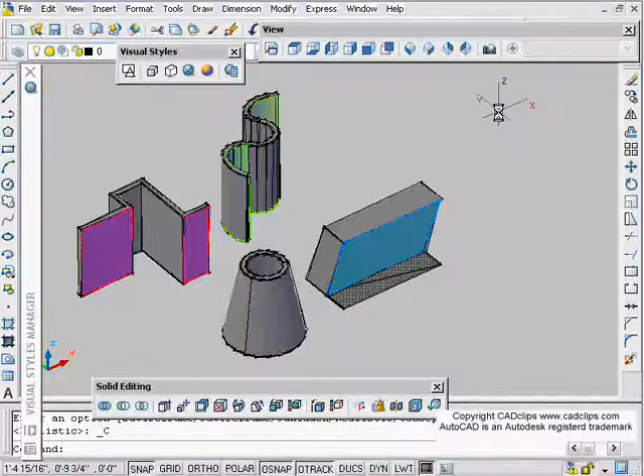In this lesson we're going to talk about Polysolids, which is a new object type. I'll start by going to Tools, Palettes, Dashboard, so I can have my dashboard in or out. In our last lesson we talked about the section plane.

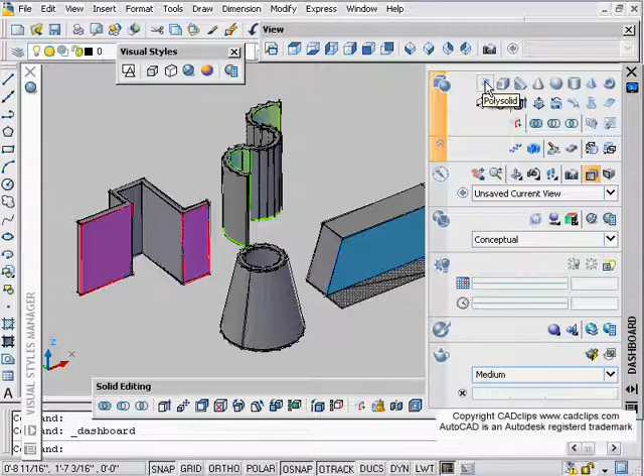Now we're going to talk about the Polysolid command. Really easy stuff - if you want, you can just pick Polysolid and start to draw, using your ortho, etc. Polysolid just draws walls in its natural state.

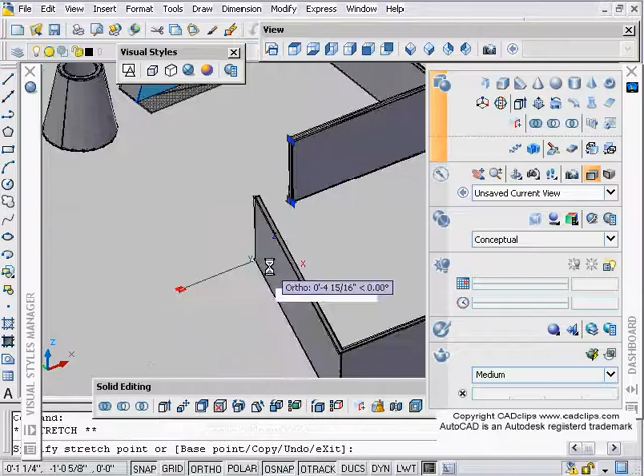Once you have that, you'll notice you have some special grips. First, you can grip here and stretch this way, and this one will stretch that way, using good old grips. The other thing is at the beginning of that Polysolid, we can grab grips and stretch these out, and that changes the whole object.

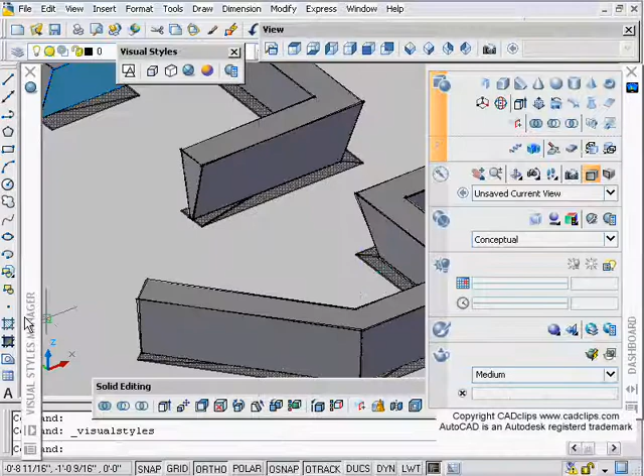I also have ground shadows turned on here - let me turn that off. I'm going to go into Visual Styles, and in Conceptual, go down to Shadows, Ground Shadows, which is right there. Display ground shadows off.

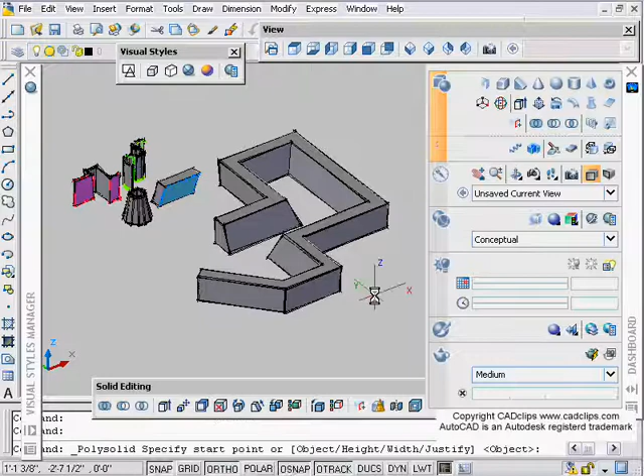Now the other thing is we can click back on here and grab this grip and stretch that out. That was just drawn again by clicking on our Polysolid command, and off I go.

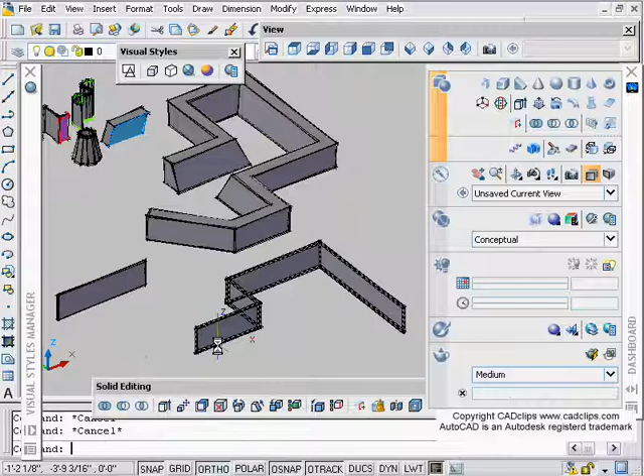Okay, the default heights and widths - the other thing is if you hit escape, it stops. Unlike some other commands, escape stops it. In this one you have to hit enter or space bar. If you hit escape, it'll just stop right there. So that's one way of doing it.

Now as you draw your Polysolid, look at your command line down here. It says object, which we're going to do - height, width, and justify. So if we say height right away, we can either type in a number or pick points. I can say, well, I want it to be this high.

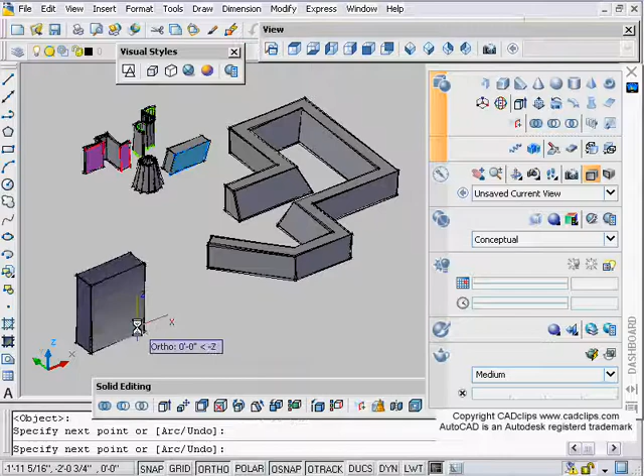And now I'm going to say W for width - I want it to be this wide. Then if I start to draw, I can use that height and width. I keep hitting escape on that, and I shouldn't - enter.

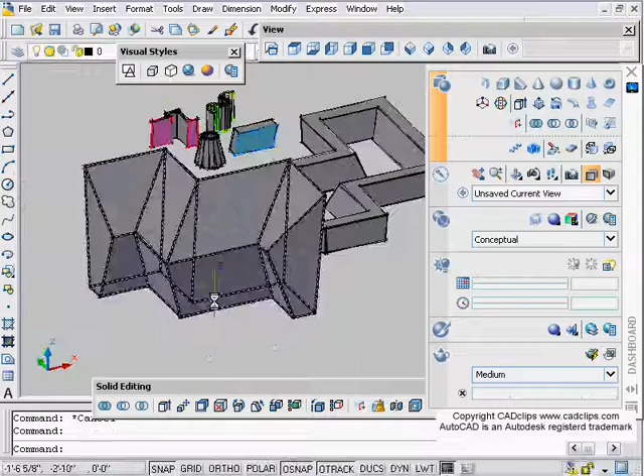So that's it, and again, same thing with my grips - up and down, do whatever I want with it. Isn't that fantastic? Use your ortho or not. You can very quickly, as you can see with shift middle mouse, get some interesting shapes right off the bat.

Okay, Polysolid - or we can just do object. Maybe I have a polyline over here. I'm going to draw a regular old AutoCAD polyline, click on here, hit enter, and pick this, and it just converts it.

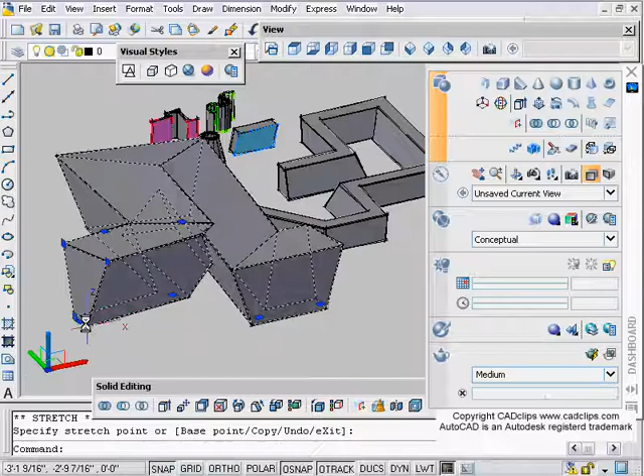After I do that, it remembered the last width and height, and then I can grip on these and do whatever I want with them. After that, if I want to draw something off of that face, I can draw a cylinder. As long as my dynamic UCS is on, I can draw off of that cylinder.

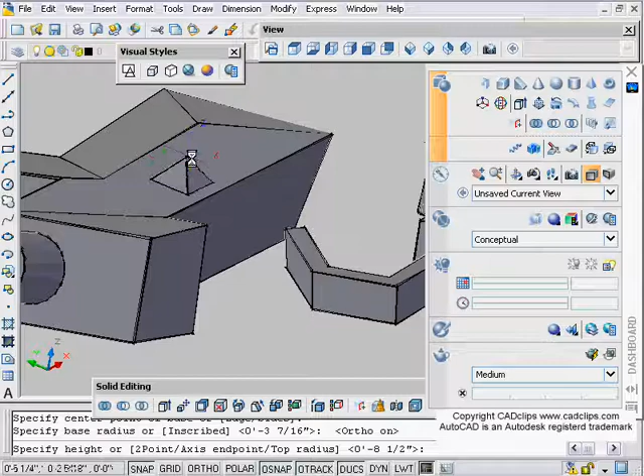So you can see how very quickly, maybe draw a pyramid using my dynamic UCS and ortho type thing, click, place that right on top of that surface. Shift middle mouse button. Let me erase these objects, and go back to my top view.

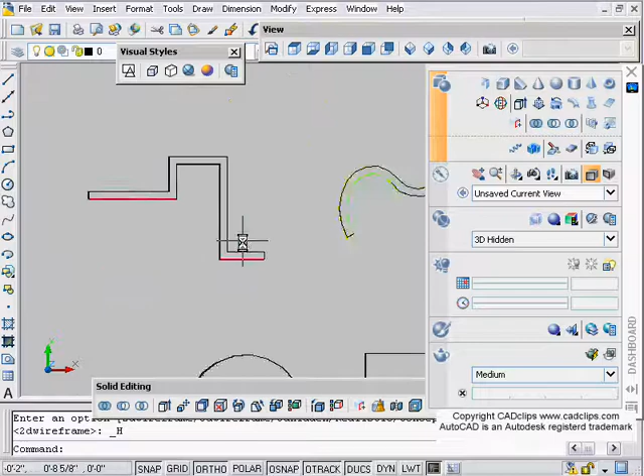That's what these are - this is a polyline that's been fit curved. I could change this back to 3D wireframe. This was a polyline, this was a circle, and this is something I made - I think this was just a line.

So let's try that. I'm going to draw a line. I'm going to draw a polyline.

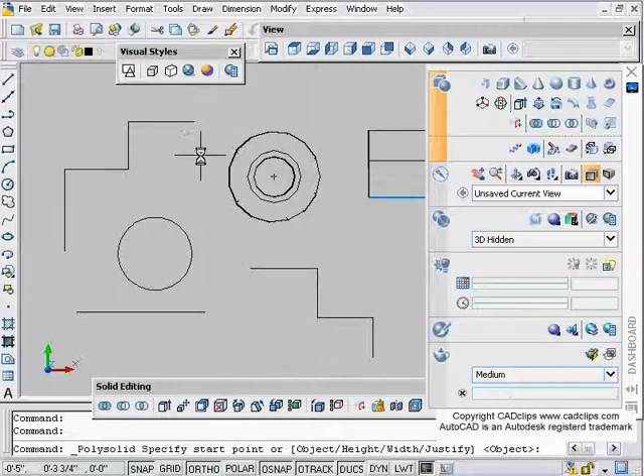I'm going to draw another polyline over here, and a circle in here. Now I'll pick on my Polysolid and set my widths and heights beforehand. Width, well I only want it to be this wide. How high do I want it? H for height, command line - about this high. Then I just hit enter, pick on this object, and it converts it.

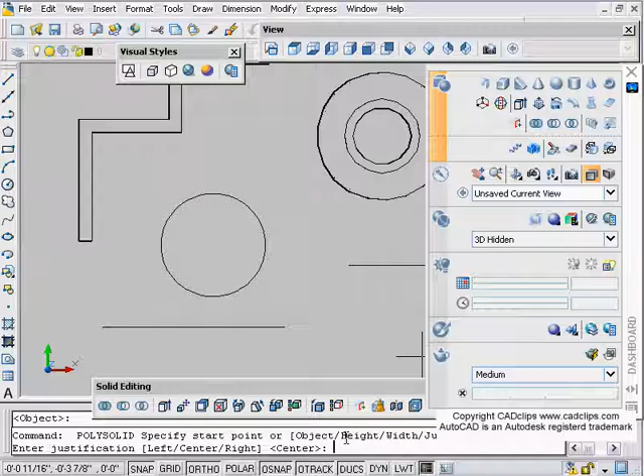We could have said justification as well. Enter, start my command. I can say J for justify - left, center, or right. Center is fine. Then enter, it's an object, pick on here and I'm done. Enter, enter, pick, enter, enter.

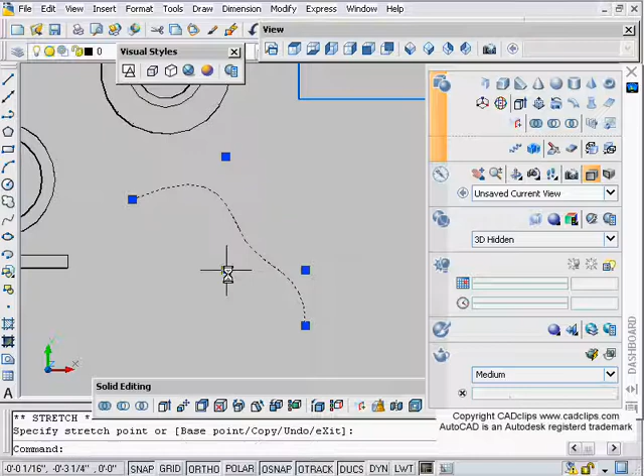Oh, I want to spline this. PE for polyline edit, pick on here, and then we'll do a spline. Enter, pick on that spline. Maybe grab my NURBS, do what I want with that. Start my Polysolid, enter, pick - converts it. Go to my 3D view and there's my 3D objects.

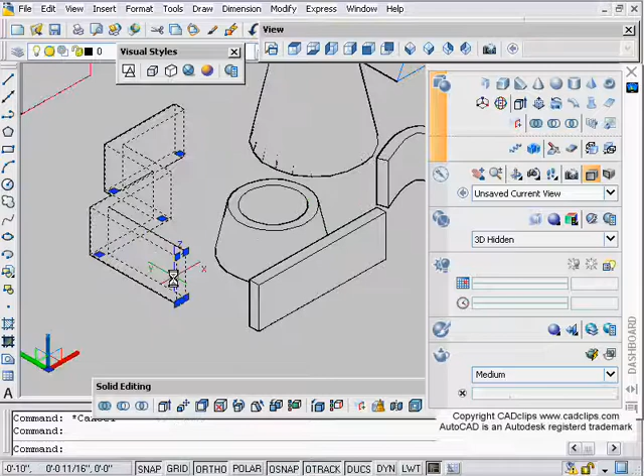There's the circle. I can grab this grip and stretch this in, stretch that one in - that's how I got that shape. This one over here, same old stuff - stretch it out, stretch it out. Grab this guy, that was just a line, nothing fancy there.

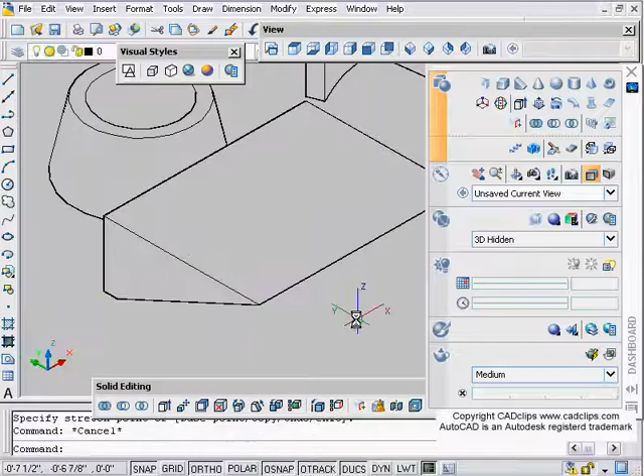Click on here, drag up, drag over. If you go back to the point, you'll notice you can change directions by using your UCS. And then this guy over here - what can we do with that grip? Turn my ortho off, you see my ortho is causing problems. Look at that, that's pretty slick.

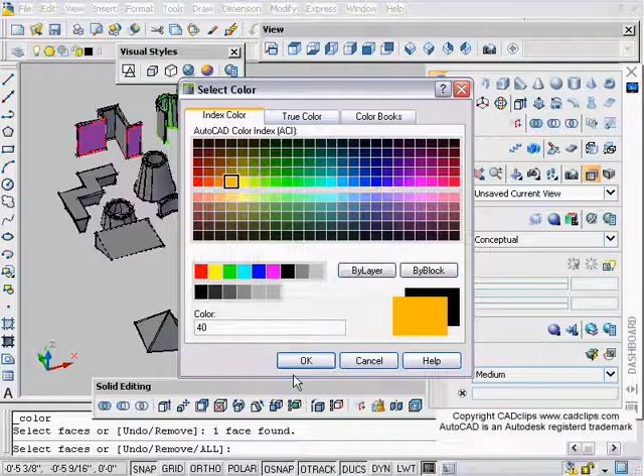Go to my view over here, and then of course all I did was go down here to color faces. Pick on here, enter, pick a color, hit OK. Color face here, enter, pick a color, hit OK. Go around and color the faces.

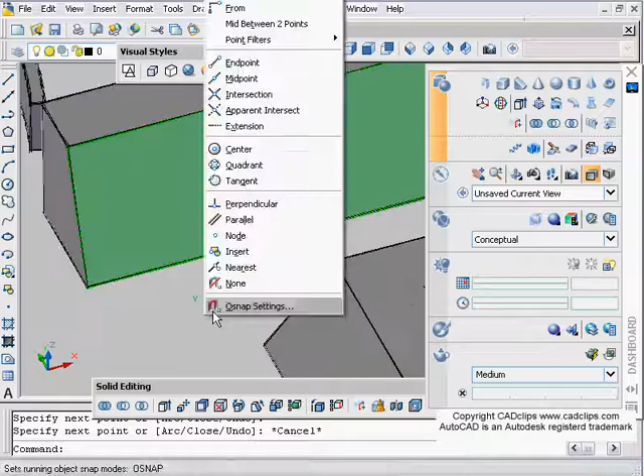So Polysolid - read your command line. You can use existing geometry, you can justify it, you can set the width and height, or you can just start to draw, depending on - maybe you want to draw even on the...

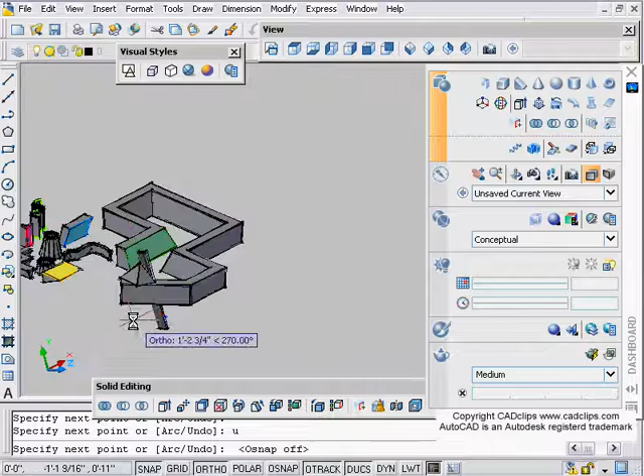I wonder if you can go on the top of this surface here. Shift middle mouse button here. Let's do our Polysolid and hover over here. Look at that. I can act - oh, I hit my snap on that, but I can take my snap off maybe.

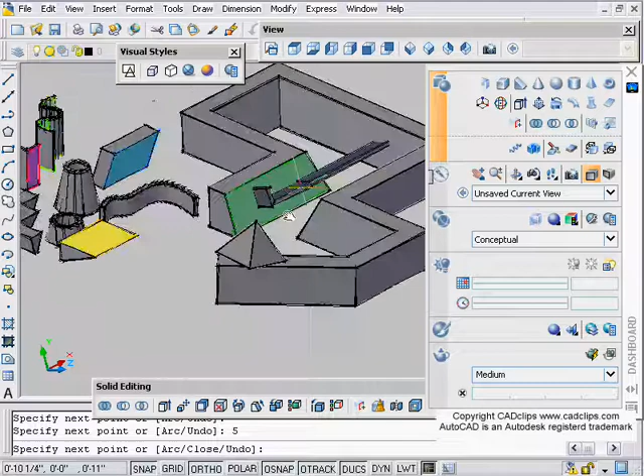I probably want to move my origin, UCS origin to that point - that might help me be able to draw in here. Go in that direction and type 5, then go up and type in the number 2, enter. So I drew that Polysolid right on the surface - that's all I wanted to explain by using my dynamic UCS.

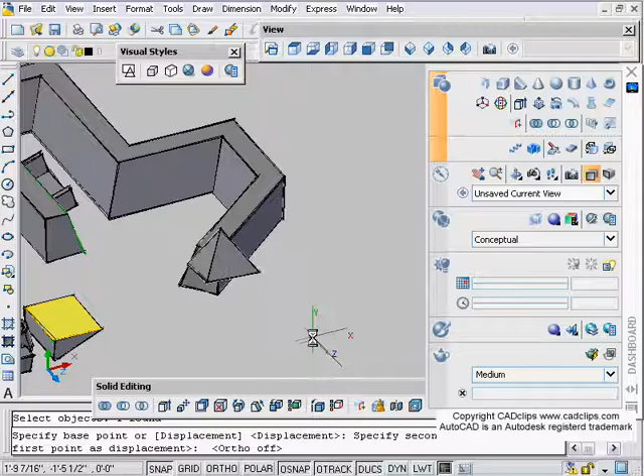Oh, there's a pyramid up in the air, right? No problem, we can go M for move, pick that, grab that endpoint, move it down to there. Now that it's down there, we can move that around. Oh now let's see where that is - oh, I got everything kind of skewed on an angle here.

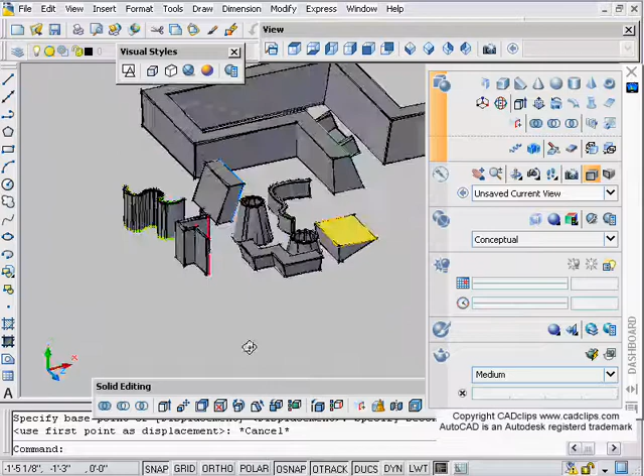Let me just get rid of that. So my point being is that you can take these objects and move them around, and as they interfere with each other, you will see them displace. So there's our Polysolid command - have a look at your command line, convert existing geometry lines. I would go in and maybe try some more of these shapes.

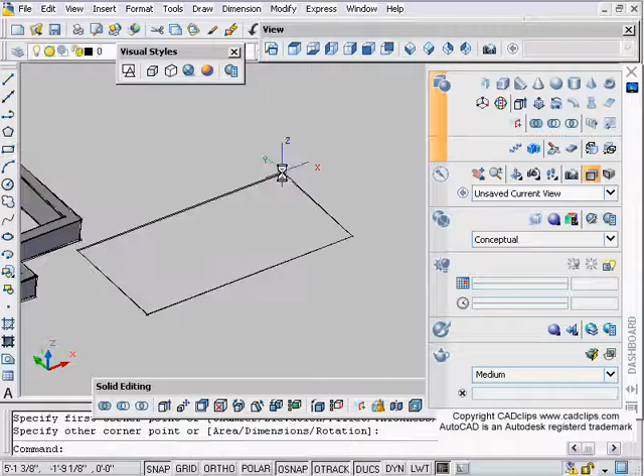Very quickly, it'd be easy to go in and make a rectangle. Oh, let's do UCS world - that's probably my problem. Make a rectangle box, pick on my Polysolid, enter, pick on here, and you're done. Then you can use your stretch command, instant walls I guess you could say, and go in and have a look with your grips and have some fun with them. They're not hard to use.